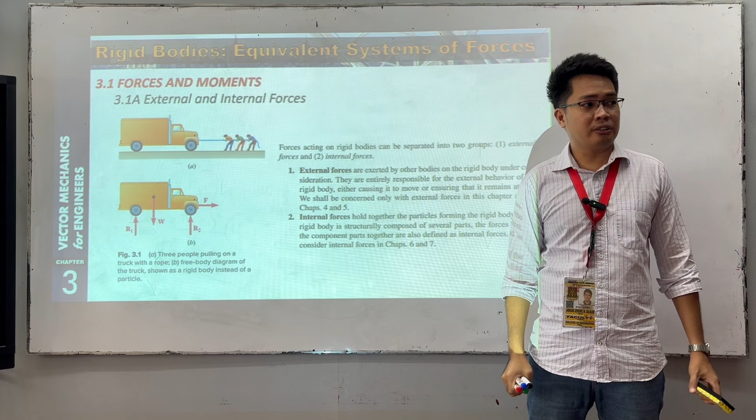I'm Sir Engineer AJ. This is Vector Mechanics for Engineers, Statics, Chapter 3, Part 3, Equivalent System of Forces, Couples and Force Couple Systems.

Now, tapos na tayo sa moments. Moment about a point and then moment about a line. Now, let's have another special moment. Tinatawag nating couple. Yung topic natin ngayon is about couple, about moments ng couple. Sige, we have here. Ano ba yung couple? Anyone who can define couple?

Mag-asawa, oo, partner. Mag-partner, mag-asawa. And dapat opposite sila. Yung mag-asawa dapat babae lalaki. The same as with statics, parehas lang yan. Yung couple, dalawang forces na the same ng magnitude but opposite in direction applied at a certain distance.

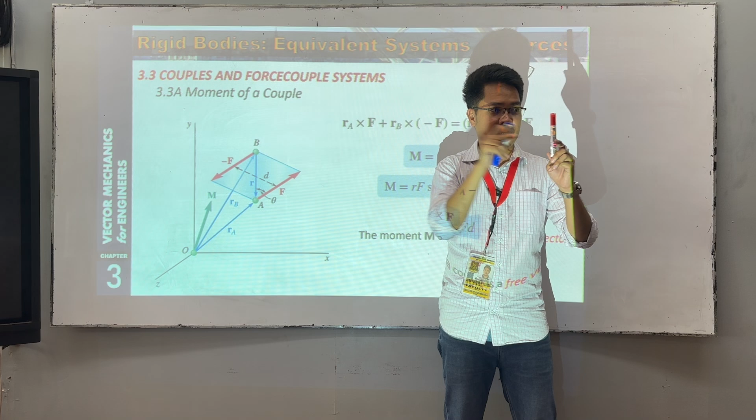So, for example, we have here a paper. Naglagay ako ng couple dito at saka dito at a certain distance. Ano yung gagawin niya? Mutuyok. So, ayan lang. Tapos na tayo sa couple. So, anong meron dito sa formulas natin? We have, for example, ito, the same magnitude, opposite in direction, that forms a couple. At a distance, D natin.

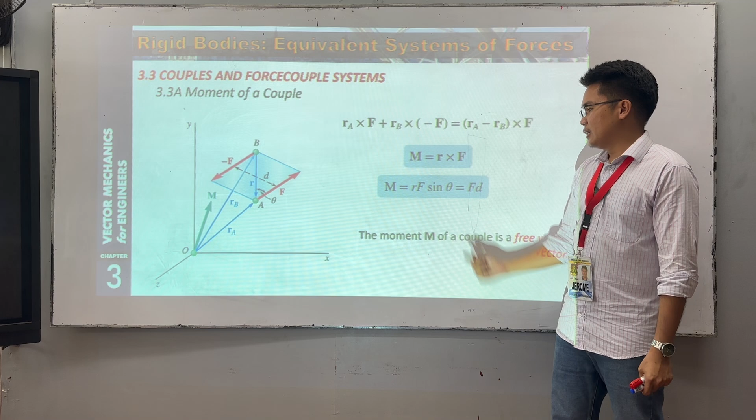So, if you want to get the magnitude of our couple, you multiply the distance in between them times the magnitude of the force. So basically, yung couple is the same lang sa moment, force times distance. Kaso lang yung force dito dalawa, both sides. Pinapaikot niya. So the same formulas yung gagamitin natin: R cross F, yung M natin is RF sin theta and force times distance. Diretso na lang natin i-apply para mas easier intindihin.

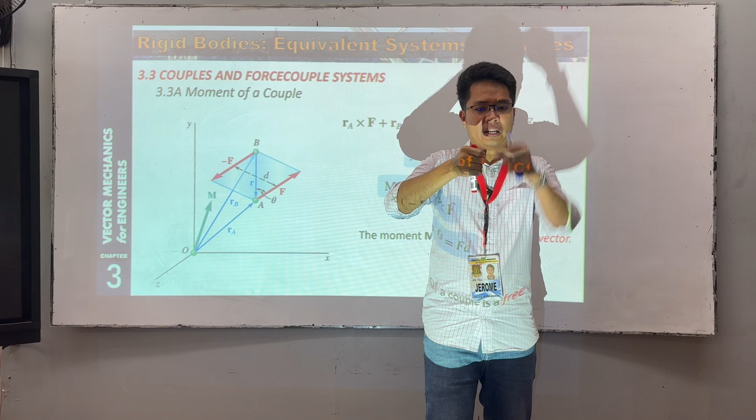Wait muna. Yung principle of transmissibility natin na na-apply natin sa forces, ano yung sabi doon? Yung force natin is pwede nating ilipat-lipat, walang mababago sa static condition natin as long as nasa line of action. Yung moment natin, for example yung couple natin, nag-apply ako ng couple dito, napaikot natin yan. What if yung couple ko ilagay ko dito sa baba? The same pa rin ba? Walang nababago, di ba? Iikot pa rin yan.

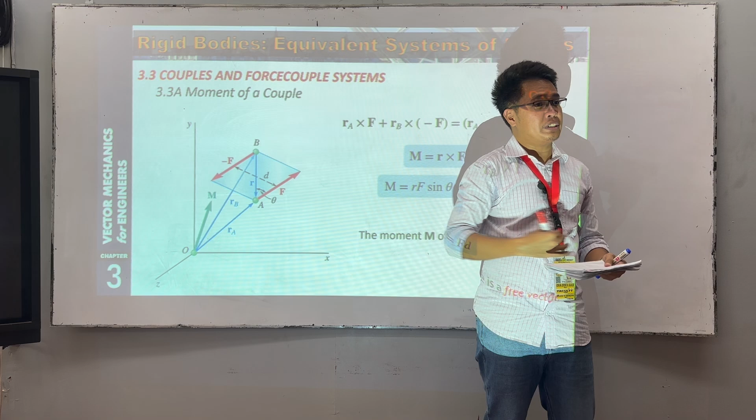Kahit saan mo ilagay yung couple mo as long as parallel sa pinaglalagyan, walang mababago sa static condition natin. Now, what if ito? Ang couple, mag-apply ako dito. Mutuyok na siya. Kahit saan ko yan i-apply, mutuyok pa rin siya. So, yung couple natin, kahit i-move mo yan up and down or along the plane, the same pa rin yung effect or yung static condition ng system natin. Walang mababago. Hindi siya pareho sa force natin.

Yung force natin, for example, we have a moment arm here. And then, nag-apply ka dito ng force pa ganyan. Walang mababago kapag ililipat mo yan along the line of action. But if yung force, ilipat natin dito, nababago na, kasi kung titingnan mo dito yung force, malaki yung moment arm. Kung malaki yung moment arm, malaki yung moment. Dito pinaliitan mo, ibig sabihin liliit din yung moment arm niya.

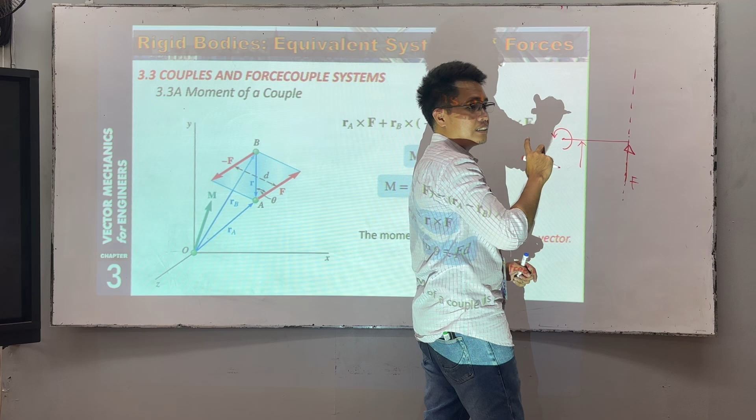So therefore, kung itong force ililipat mo sa hindi nasa line of action niya, dapat dagdagan mo ng additional moment dito para equivalent sila. So, kung maglilipat ka ng force, may idadagdag kang moment para the same yung effect. Klaro? Again, importante ito. Maglilipat ka ng force that is not along the line of action, ano yung idadagdag? Moment. Sige, let's try to have an example.

So, yung moment natin is yung tinatawag na free vector. Ibig sabihin, pwede natin siyang i-apply kahit saan, as long as parallel. Nasa plane of action or parallel sa plane of action. Pwede mo yan ilipat-lipat. That's free vector. So, ano yung mga application ng couple natin? Kabalo na ana.

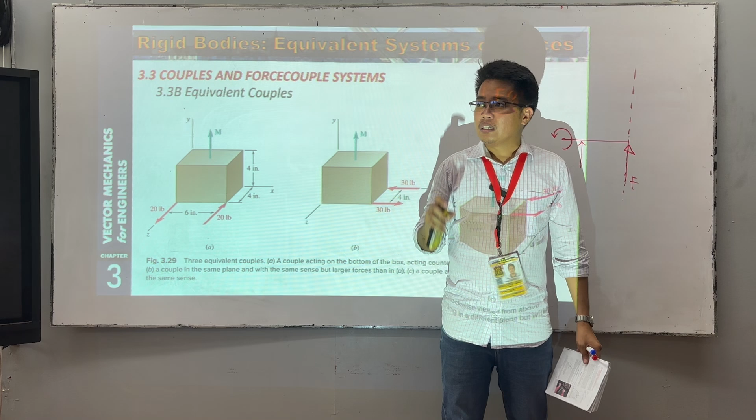Anong meron din dito? Ito. Let's have this one. A couple, makukonsider natin na the same siya if parallel and ang isang condition, the same yung magnitude ng F times D niya. So for example, ito. Nilagay ko siya, dito yung couple. At the same plane, ito yung ginawa kong couple. They are equivalent. Bakit? Dalawa yung condition. It should be the same plane or parallel plane and the product of F and D should be the same. The same sila ng plane.

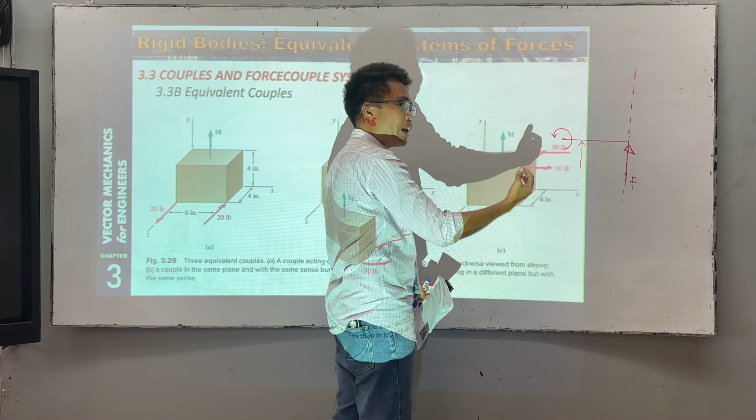Check. 6 times 20, 120. 4 times 30, 120. So itong couple na to at saka itong couple na to, the same yung effect sa box natin. Now, another condition. Yung sabi ko kanina na ilipat natin as long as parallel. So kung dito nasa baba pa, nilagay ko sa taas, and then the same yung magnitude. As long as the product F times D is equal dito, F times D niya, and parallel sila, the same pa rin yung effect sa box natin or sa system natin.

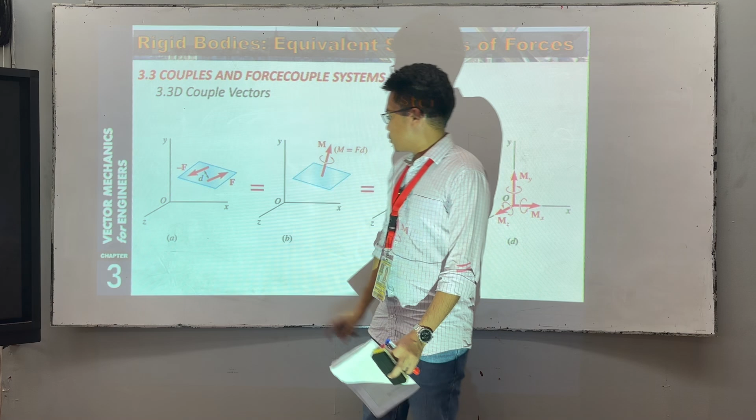So since yung couple natin is a vector, pwede natin yan i-resolve into components. So meron siyang component along Mx, My, Mz. So this couple here, pwede natin free vector yan. So pwede natin ilagay dito. As long as the same sila ng sense, the same yung effect sa system natin. So ayan, pwede natin nalipat dito. So ito siya, yung vector natin, couple is a vector, therefore pwede natin siyang i-resolve into components, Mx, My, Mz natin. Sige, let's have an example.

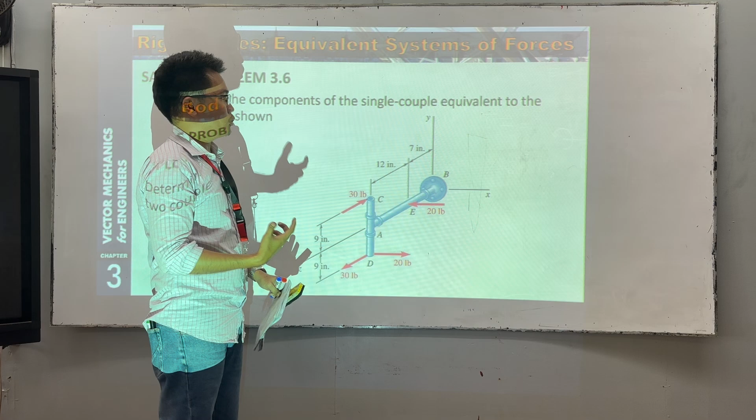Determine the components of a single couple equivalent to two couples shown. Ano yung couple natin dito? Ang sabi dito sa problem is, mag-determine ka daw ng component ng single couple that is equal daw sa dalawang couple na nandito. May nakikita ba kayong couple? Yes or no? Kasi ito siya, partner dito, it will have a couple na papunta doon. Ay, wait lang. Baliktad. Papunta doon, sa kabila.

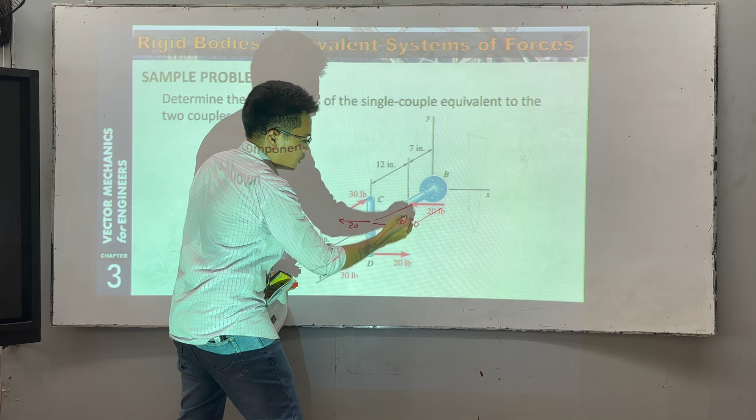Now, ito at saka ito, pwede ko yung i-partner sila, di ba? Ito. Ayan, may couple na papunta sa z-axis. May imagine nyo? Papunta doon. This is our Mz. Now, another couple. Ito. Ito. Papunta doon. This is our Mx. Klaro?

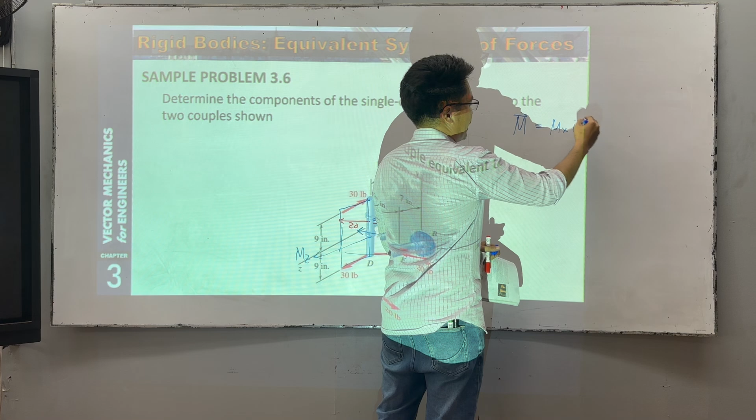So, ano yung couple natin ulit? Pwede natin to siyang ma-represent as Mx i plus My j plus Mz k. So, knowing that, ito, My. Ano yung My ulit? Force times distance. So, ano yung force natin? 20. Ano yung distance between the 20? We have 12. So times 12. How about yung Mx natin?

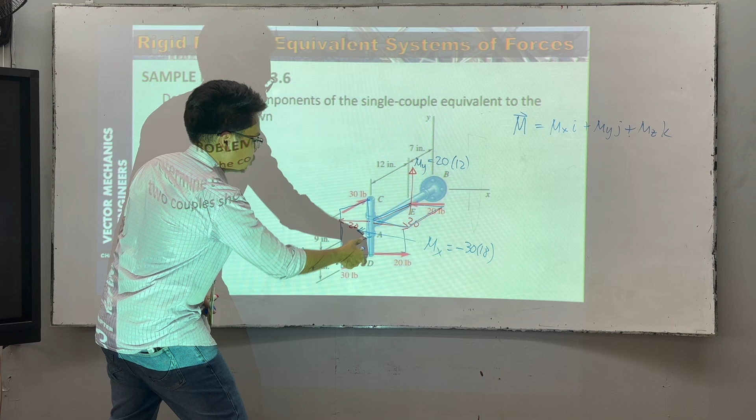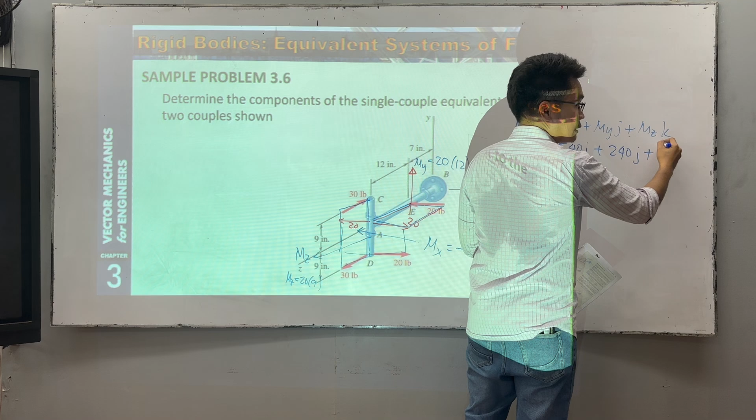So, ayan. So, yung Mx natin is ito. Pila ni siya? 540, no? So, this one here is negative 540i plus, ano yung My natin? 240j plus 180k. So, yan na yung couple natin. No?

Let's have this one. Ito. So replace, sabi dito, replace the couple and force shown by an equivalent single force applied to the lever. Determine the distance from the shaft to the point of application of this equivalent force. Of this equivalent force. No? Ano yung sabi niya dito?

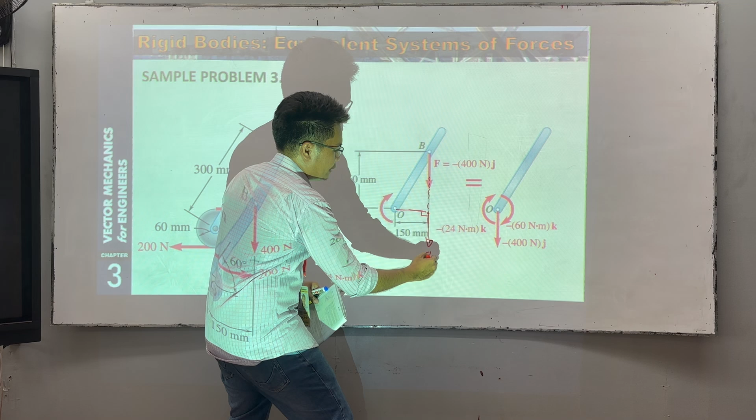Ano yung distance na to? We have 260 mm to. Hindi given, 300, hindi 260. Ito, this length here is 300. Tama? So, therefore, this one here is 300 cos 60.

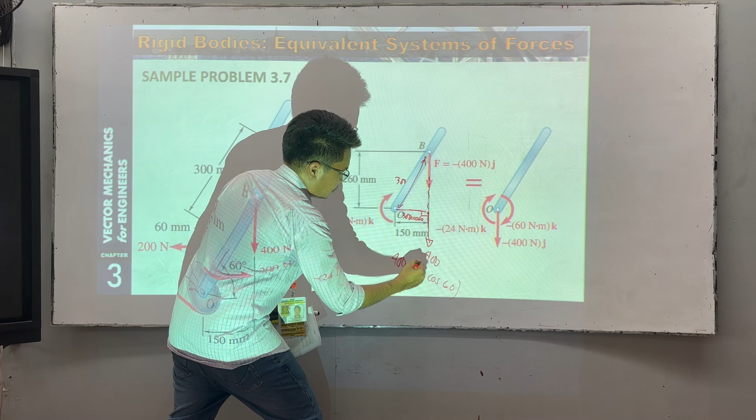So therefore, yung moment na idadagdag natin is force times the moment arm. We have 400 times 300 cosine 60. 300 mm, so gawin natin tong meters. This becomes 0.3. Pakalkul daw, pila na? We have 60, so that's why we have here 60. And it's negative kasi clockwise, going inside.

No? So ayan, klaro to. Klaro pa to, okay? So sige. Now, ito na, extend natin to. Ito na yung natin, no? Yung latest na image. Ngayon, i-transform natin to siya into isang force and then isang moment, no? So yung force natin, isa lang naman yan, no?

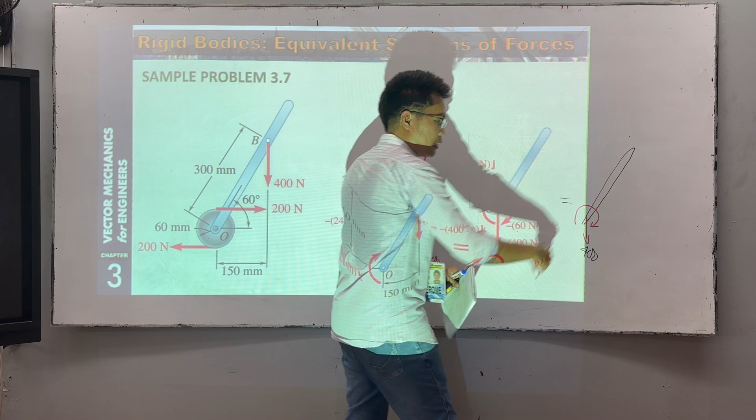This is 400. Ano naman yung moment natin? That is just the sum of the two moments here, no? So we have negative 24 plus negative 60. We have negative 84. So this one here is negative 84.

Now, i-transform na naman natin to, no? Dito, i-transform natin dito. So i-transform natin in such a way na ito, ililipat natin somewhere dito. Na yan lang, wala nang ibang moment.

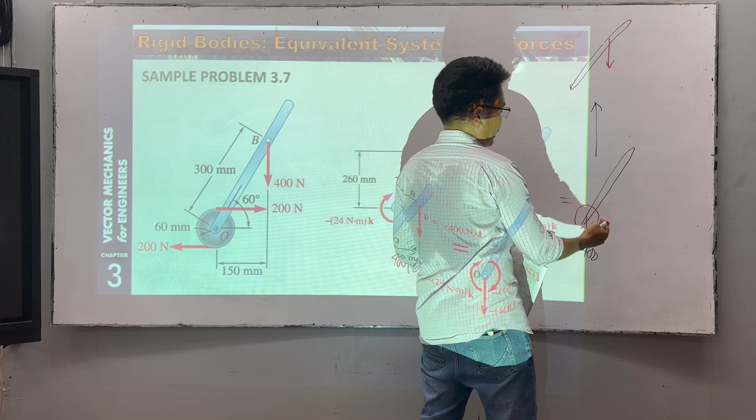Now, tingnan kayo dito. Di ba itong 400, kung ililipat ko to dito, ano yung madadagdag? Moment. So ano yung rotation ng moment natin, from this point? Ayan, ito. We have counterclockwise, no? So meron tayong counterclockwise na moment. We have positive, no? So that moment here, kung ito siya is 400, ano yung moment natin yan?

That is just force times distance, no? Sabihin natin itong point na to. So ano yung force natin? Ito na force, no? By principle of transmissibility, pwede natin ilipat dito. Perpendicular na sila ng distance, no?

So we have 400 times, ano yung distance na to? Hindi natin alam, no? Alam natin that this distance here, ano yung distance na to? X, hindi pa natin alam. So therefore, this distance here is, ano yan? X. Sabihin natin, ano yung theta natin dito? 30, no? Nasa taas, 30. So we have 30 here, 30 degrees. So therefore, we have sine 30 degrees.

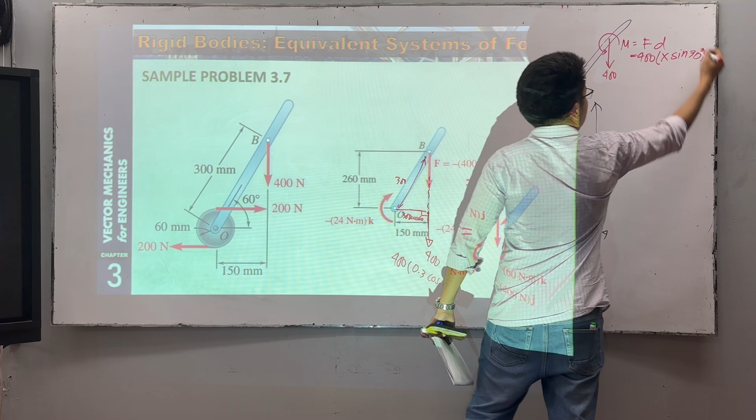No? So ayan, sulat natin dito. Ano yung force ulit? 400. Then ano yung distance? X sine 30 degrees. So ayan lang. Now, meron pa tayong natirang moment dito. O yung couple natin, no? Di ba yung couple natin is a free vector?

Pwede natin yan ilipat-lipat, no? Now, ngayon, kung dito siya dito, ilipat natin dito para align sila. So ano yung rotation niya? Pabaliktad, no? So ano yung magnitude niya? This is M2, this is M1 na lang. That is 84, 84 ba? 84, ayan. Now, yung gusto natin is dapat force lang yung matira.

So therefore, para force lang yung matira, ano dapat yung mangyari sa M1 at saka M2? Makakancel dapat, no, makakancel. So since opposite sila ng direction, it should be na the same dapat sila na magnitude, no? So M1 should be equal to M2, no? Para makancel maging 0. So ano yung M1? 84. Ano yung M2?

400x sine 30. So therefore, ano yung x? X is just 84 over... Okay lang yan, kay, di-equate naman yung mga magnitude that they should be the same. No, they should be the same. So 400 sine 30. So try to calculate daw. Pila to?

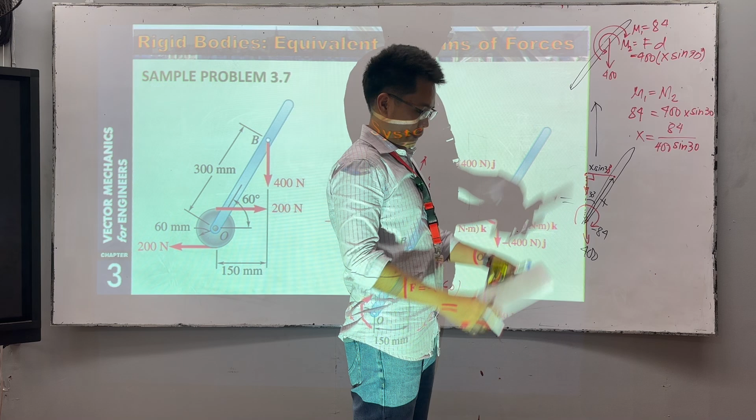Okay, so nakuha na natin. Yung x is equal to 0.42 m. No? Medyo confusing lang to yung paglipat-lipat.

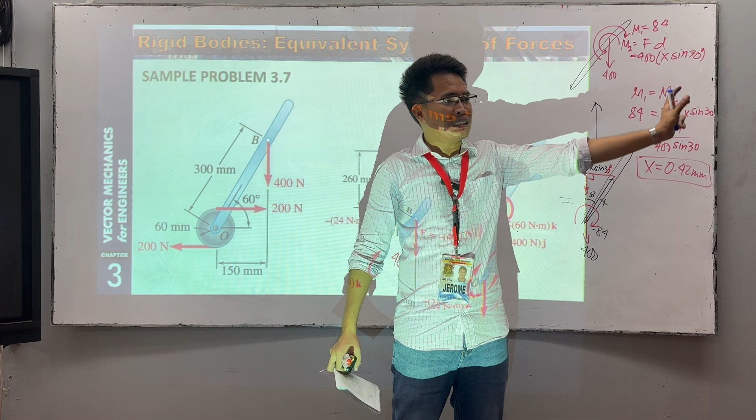No? Ito lang yung tatandaan, no? Kapag maglilipat ng force, ano yung madadagdag? Moment. Kapag maglilipat ng moment, ano yung madadagdag? Oh, walang madadagdag lagi, no? Walang nadadagdag. Yung moment natin, pwede natin yung ilipat-lipat. Yung couple natin, kasi free vector yan. Again, kung maglilipat ka ng force, ano yung madadagdag? Moment. That is dapat kung hindi nasa line of action.

Oh, kulang yung statement, no? Kung maglipat ng couple, ano yung madadagdag? Wala. So, pwede siya ilipat-lipat lang. Klaro? Sige, so erase ko na to. I-erase mo lang. Ayan. Oh, force na yung natira.

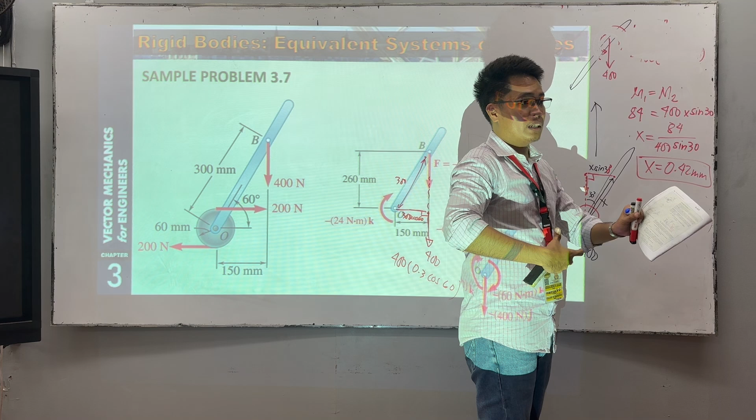Ha? Ano? Yung ano lang, di ba opposite na sila ng direction. It should be that their magnitude is dapat equal. Kasi yung isa tutulak doon, yung isa tutulak doon. Inga na, so hindi mo na kailangan ng sign pa. Alam mo na naman na opposite sila. So dapat the same sila na magnitude para mag-cancel. No? So ayan lang. Oh. Sige.

So, we have this one. No, hindi lang tayo pa isa-isa, i-apply din natin to sa 3D. So, if we have a system wherein ang system natin experiences a force applied at different points, this system here can be reduced into a force couple system. So, from all forces, ni-reduce natin into one force and one couple or one moment.

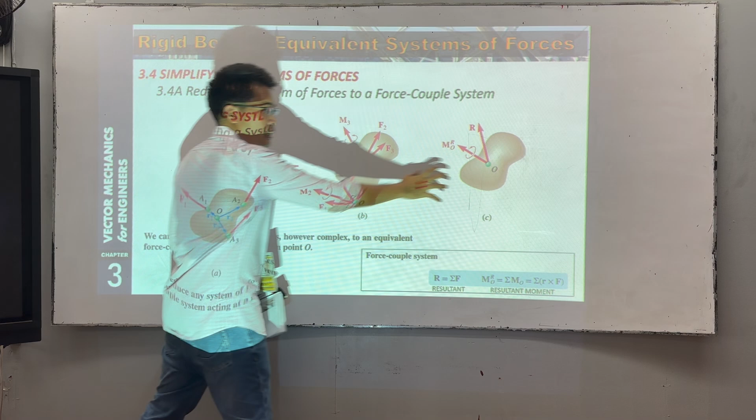So ano yung ginawa natin? For example, ito, F1. Yung F1, i-reduce natin from this papunta dito, ilipat natin dito sa O. Ano yung madadagdag? Yung F1 na lipat dito sa O, yung nadagdag is moment 1. Yung F2, ilipat natin sa O, yung nadagdag is M2. Then lastly, F3, ilipat natin dito, nalipat doon, so M3. Ngayon, ito siya is, yung system natin can be reduced into a moment or yung couple natin and a force.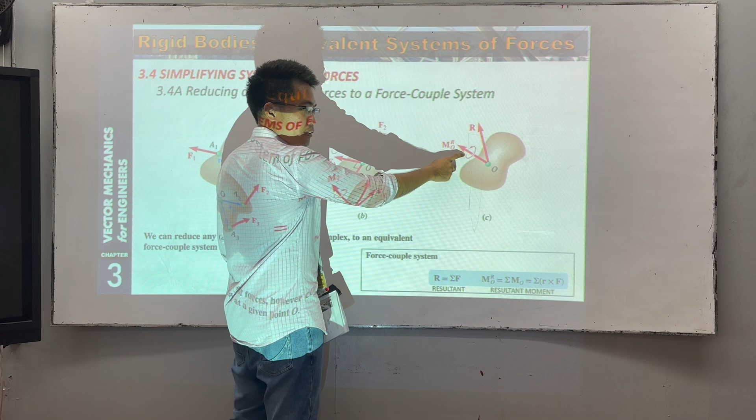Ano yung gagawin lang? Isum up lang natin lahat ng mga moments, that is our moment here. Isum up natin lahat ng force at that point O, yan na yung R natin. So, basically, yung equation na magagamit natin dito is ito lang. In reducing our system from many forces applied at different points, reduced to a force couple or force moment system, yung gagawin mo lang is isum up mo lahat ng forces, that is the force or resultant. Sum up mo lahat ng mga moments, ayan, that is our moment na ilalagay natin dito. And the same pa rin yung formula, R cross F.

Okay? Klaro pa? Sige, relax na, relax. Ako po, di kapoy na.

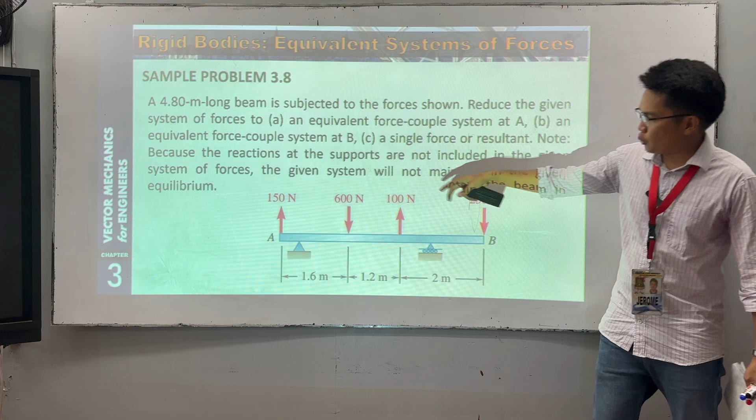Sige, let's have this one. Anong meron dito? Meron tayong beam na yung length daw niya is 4.8 meters long, subjected to different forces applied. Reduce the given system in 3 conditions, 3 different na hinahanap. So sa letter A, i-reduce daw natin to an equivalent force couple system at A. So lahat ng forces natin dito, papalitan natin ng force couple applied at A. So ayan lang.

Sige, letter A muna tayo. Ano yung formula ulit kung i-reduce natin to into a force couple or force moment? Sa force natin, that is just summation of all the F. So ano yung mga F na nandyan? We have positive, negative. Positive. So 150 minus 600 plus 100 minus 250. I-sum up natin yan. Yung resultant natin is 600 Newton negative, or going downward. Ayan lang. So, ito, pwede natin yung erase lahat and then palitan natin ng force na 600.

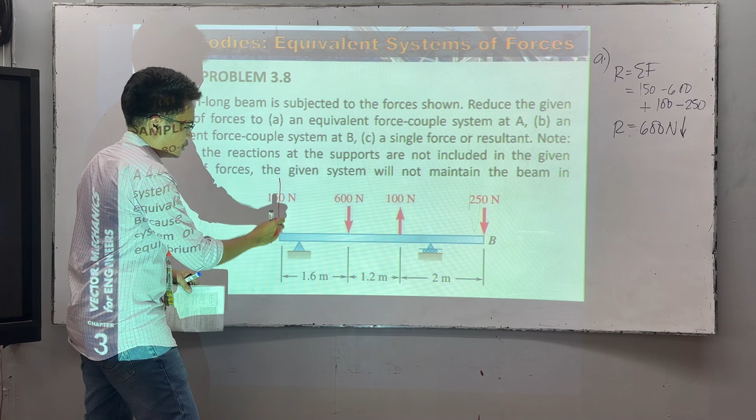Pero kulang pa, dapat meron pa tayong moment. I-reduce natin yan into a force, moment, or force couple. So, kung meron na tayong force, ano naman yung formula sa moment? That is just the summation of R cross F. So, ito.

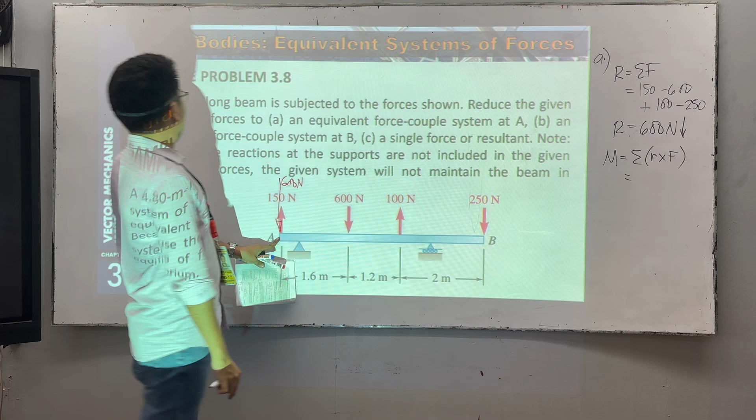So, ang unang force is itong 250, going downward. Ano yung R niya? We have 4.8. 4.8 meter, I, J, or K? O, I, kasi dito papunta dito. So, we have I, cross, ano naman yung force niya? 250, negative J. So, ayan, plus, yung pangalawang force natin, ito, ano yung moment R niya?

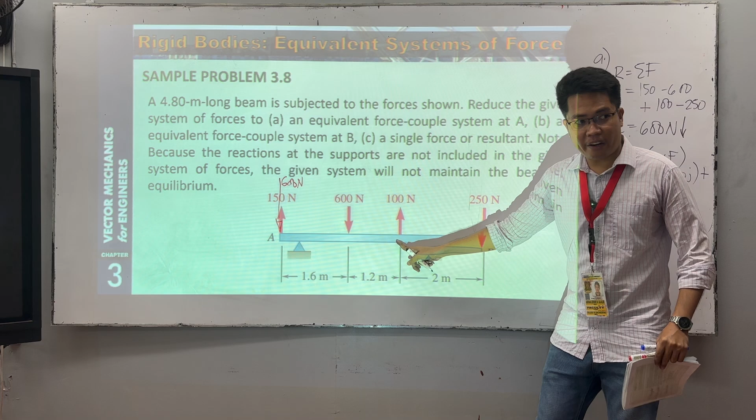2.8, I. Cross, ano yung force niya? Positive 100 J. Then, plus na naman. We have moment arm, positive, negative. Positive 1.6 I cross negative 600 J. Then plus. Ang 150, ano yung moment arm niya? Moment arm. Zero. So wala, so wag na nating isulat. So ayan lang, i-solve natin to I cross J.

I cross J, positive K times negative, that is negative something. Negative what? 4.8 times 250 daw. 1,000... 4.8 times 250, 1,200. So I cross J is positive K times negative, negative K.

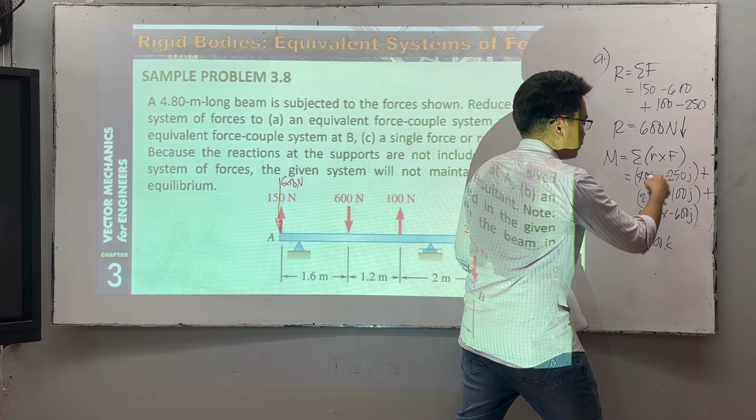Then itong pangalawa, I cross J, positive K. So 2.8 times 100, we have 2,000... uy, 280 pala, sorry. Then lastly, I cross J, positive K times negative, negative K, we have 960. So i-total natin to, pila na? Negative 1,880.